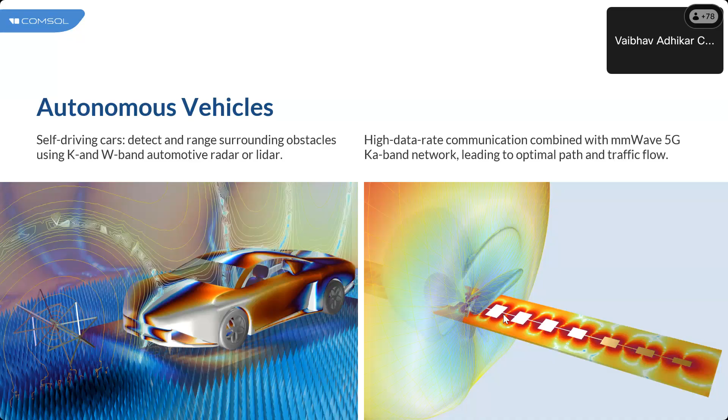Now, let us broaden our view of high-speed communication, moving from tiny electronic devices to something significantly larger, like the cosmos. Indeed, we are talking about satellite communication, a technology capable of enabling long distance transmission by bouncing the signals from one satellite to another satellite. We have witnessed attempts to establish a global internet service by deploying numerous satellites into low Earth orbit.

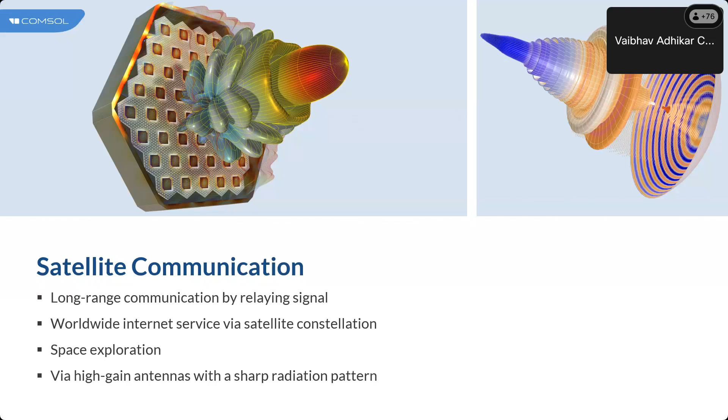Then what sort of tangible components can be represented using these numerical models? They could consist of commercial off-the-shelf antennas as well. It's noteworthy that devices need not be radiating. They could be employed to contain a signal through the process of dividing, combining, or even coupling. Alternatively, they could be selectively focused on a particular band to filter or block the other signals. There exist simulation models that are specifically designed to observe these physical effects.

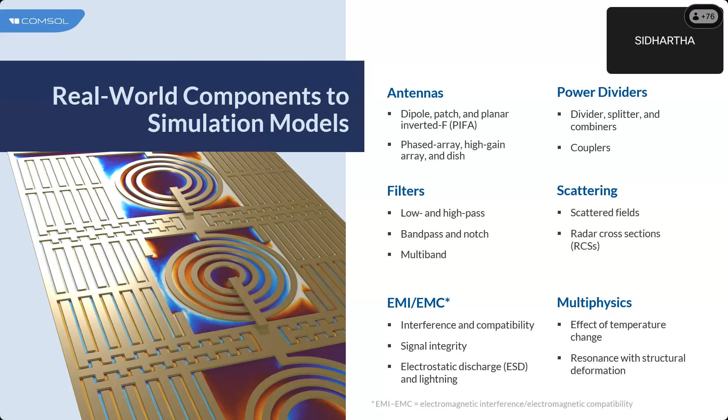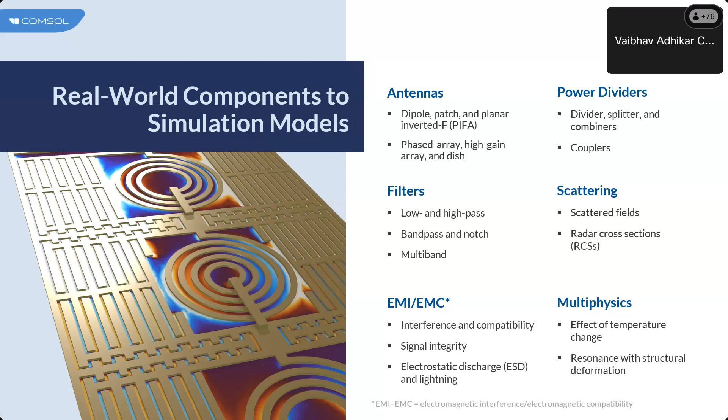Regardless of what these models represent, we typically verify the S parameters or field intensity to be sure about the susceptibility of the device and the extent of the unwanted noise that could be generated. Within the electromagnetic simulation model, it is also possible to incorporate factors such as the thermal drift effect and structural distortion, which can alter frequency predictions.

Certainly, devices such as these we have discussed can all be modeled using COMSOL Multiphysics, a comprehensive software tool that enables the realization of multiphysics simulation.

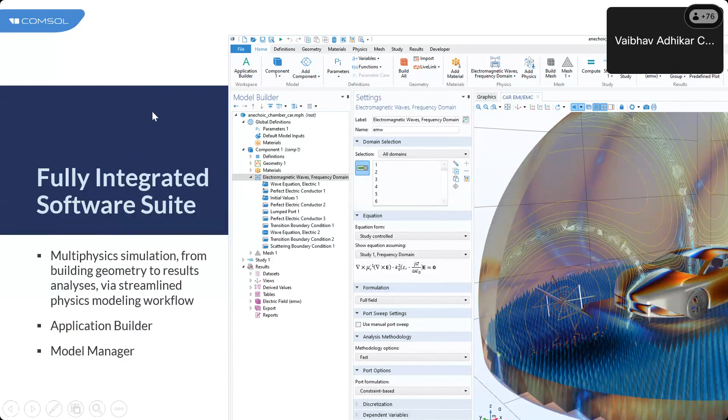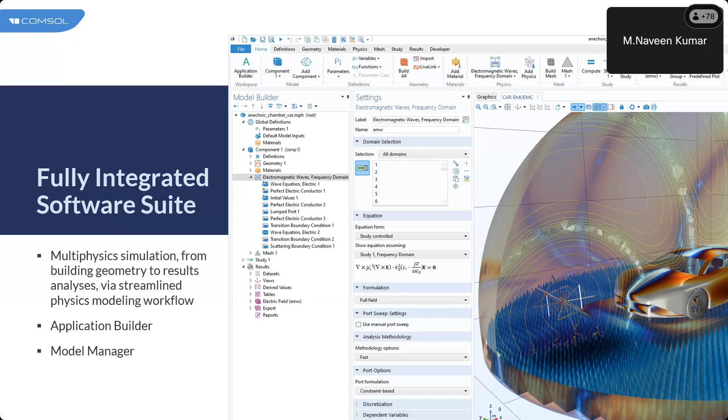Okay, thanks. So in the previous slide I discussed various devices that can be modeled with electromagnetic simulation. And certainly, these devices can be modeled using COMSOL Multiphysics, a comprehensive software suite that enables the realization of multiphysics simulation. It spans everything from geometry creation to result analysis, offering a streamlined modeling workflow.

You can even transform your simulation model into user-friendly apps featuring a more intuitive and tailored graphical user interface. These apps can be shared with peers or clients via web browser or standalone executable files. That does not necessitate additional software license purchases to run these apps.

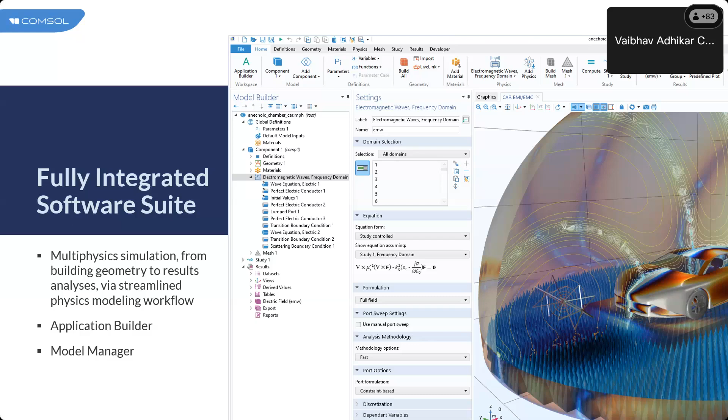Let's take a closer look at the COMSOL Desktop. We present a clean, user-friendly interface where all modeling steps are logged and can be amended later if required. This primarily takes place in the Model Builder window. We enter or choose our custom settings in the adjacent window, and then visualize the results in the Graphics window.

The top horizontal menu here houses the most crucial options, saving you from having to remember the location of specific boundary conditions. Alternatively, you can simply right click here on the physics and

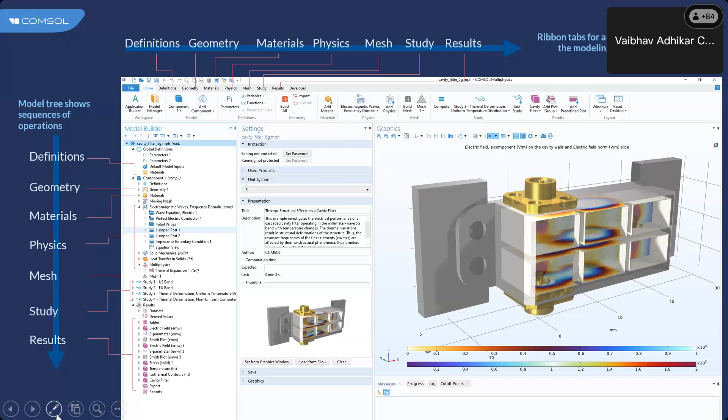With COMSOL, we offer a wide range of tailored software to address electromagnetic phenomena. Indeed, we boast a strong portfolio for electromagnetic simulation, covering low frequency to high frequency, and at times providing faster, more efficient solutions via asymptotic methods.

Now, when we are discussing millimeter wave or sub-terahertz for the next generation mobile network, which product should we opt for? Regardless of the frequency, here we are solving Maxwell's wave equation when running the full wave simulation. However, each module is specialized to offer an enhanced modeling environment for specific applications.

For millimeter wave simulation, the RF module is well suited frequency-wise. The Wave Optics module also addresses the millimeter wave band, but the choice depends on your preference. You may prefer the default setting in the RF module, where you specify the material properties with the permittivity, permeability, and conductivity, along with electrical circuits and the lumped component approximation, analyzing the S-parameter response.

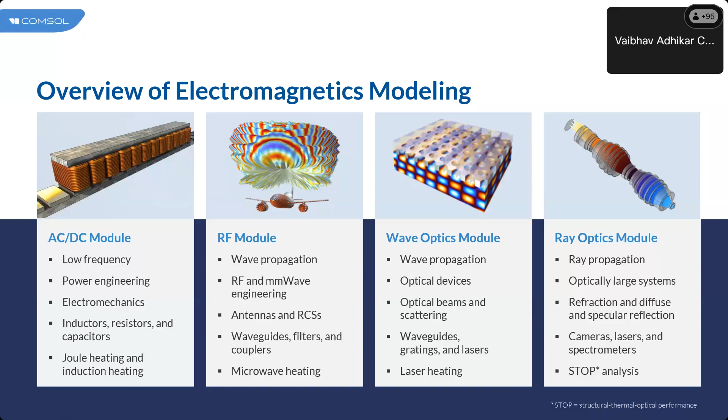Now the question arises, how would we make a simulation model using these modules? For instance, with the RF module. Well, the RF module is a high frequency electromagnetic simulation tool designed to address various electromagnetic phenomena by combining different physics interfaces and study steps.

It is crafted specifically for design engineers focusing on microwave, millimeter wave, or even terahertz applications, facilitating the modeling of components such as antennas, waveguides, filters, passive circuits, metamaterials, or even frequency selective surfaces. It employs the finite element method to calculate the power dissipation.

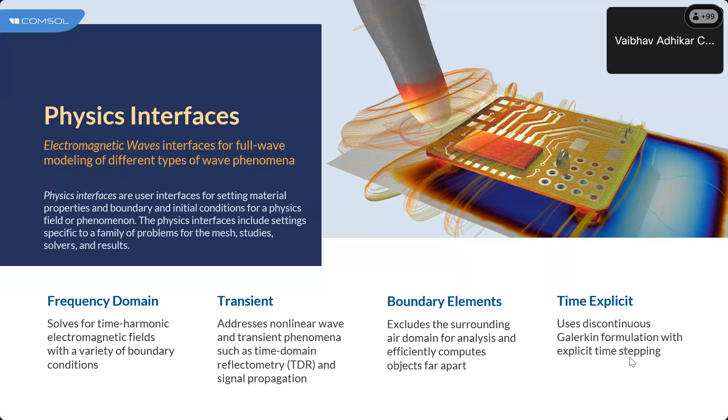Electromagnetics modeling isn't restricted to the frequency domain, but it is also possible to consider time domain analysis. The transient interface is an add-on for studying nonlinear electromagnetic wave behavior and time domain reflectometry analysis. Further, the asymptotic interface will allow for a quick estimation of the radar cross-section of a convex type scatterer.

Additionally, when the coupling between adjacent transmission lines is minimal, the transmission line interface can also save significant time and resources. This interface uses the transmission line equation to solve simulations that typically take several minutes to hours within just seconds.

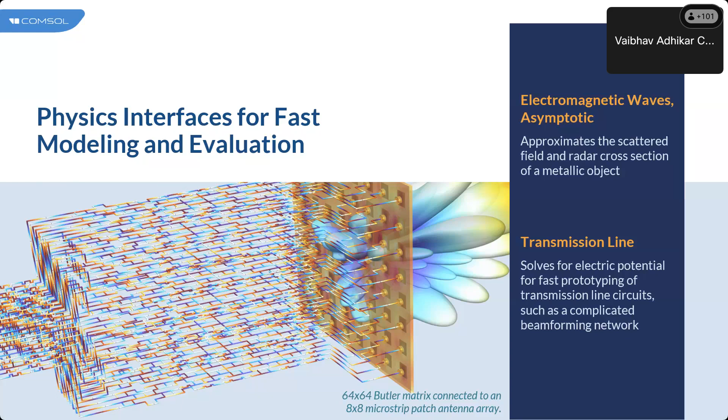You would also have the opportunity to maximize your computational resources by merging two distinct numerical methods, that is the finite element method and the boundary element method. This combination allows precise modeling of the sub-wavelength using FEM, with the results bidirectionally coupled with the boundary element method. This way, we can also observe wave propagation in free space beyond the traditional simulation domain limit. This provides insights into the effect of large platforms where the FEM device is located.

Real world scenarios cannot be fully captured by a single physics domain, as we live in a multiphysics world. Hence, all equations in COMSOL simulation models are fully coupled, allowing electromagnetic fields to influence and be affected by other physics. This capacity for multiphysics study extends the simulation capabilities beyond traditional single physics analysis.

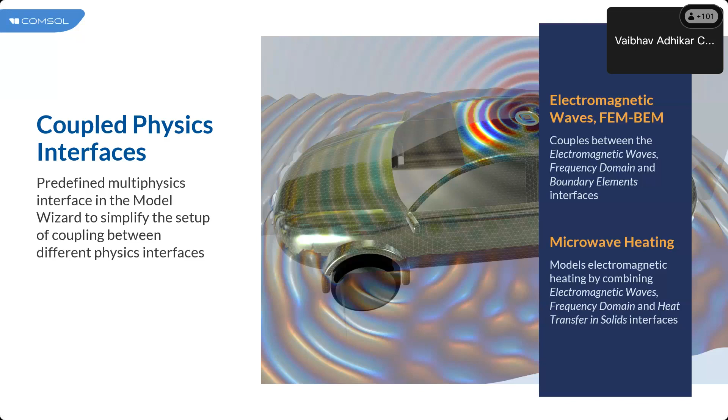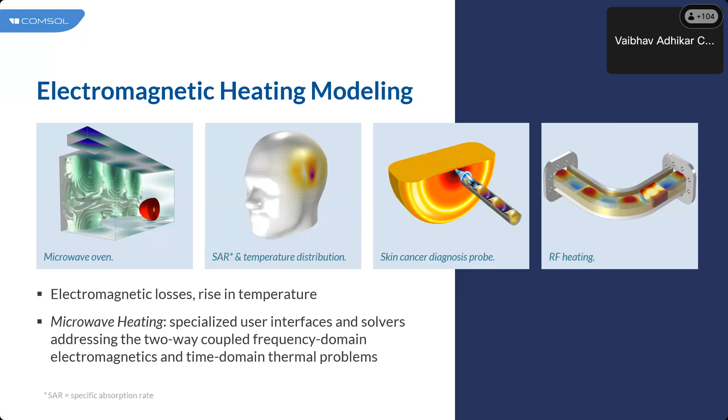For instance, see the combination of electromagnetics with heat transfer. The equations are fully coupled, enabling the interplay between the electromagnetic fields and other physics domains. By solving Maxwell's wave equation in the frequency domain and the heat transfer equation in either the stationary or time domain simultaneously, we can calculate the temperature variation over time and the effects of changing material properties due to these temperature shifts.

Traditional electromagnetic analysis can be further enhanced to include structural deformation, which alters the resonating behavior of your testing devices. Multiphysics simulation effectively captures millimeter wave circuit performance under realistic operating conditions, thereby eliminating the need for expensive and time-consuming environmental tests. Through simulation, the number of iterations in the development cycle is reduced, and it can fast-track the design, fabrication, and testing process.

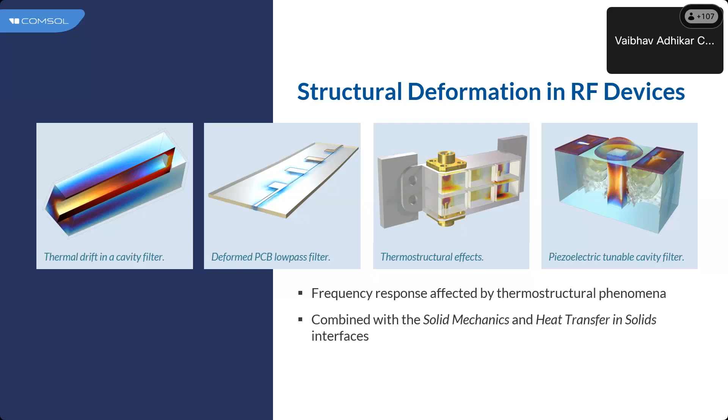In simulation software, the actual world is represented by numerical expressions known as boundary conditions. Consider a semi-anechoic chamber with biconical antennas linked to a network analyzer. This connection can be symbolized by a lumped port. The absorbers on the side walls and the ceiling can be mimicked with an infinite upper half space, minimizing reflection, which can be represented by an absorbing boundary condition.

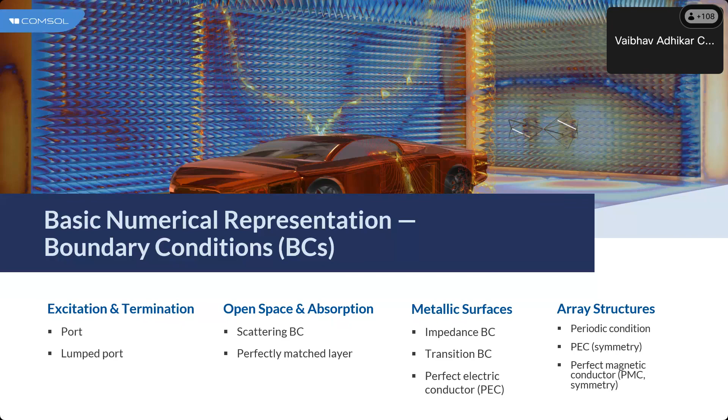If the simulation structure is repetitive, it isn't really necessary to include all the elements. For example, a wall of absorbers could be simplified to a single pyramidal unit cell with a periodic condition. Here you can see a virtual EMI/EMC testing environment setup for vehicles.

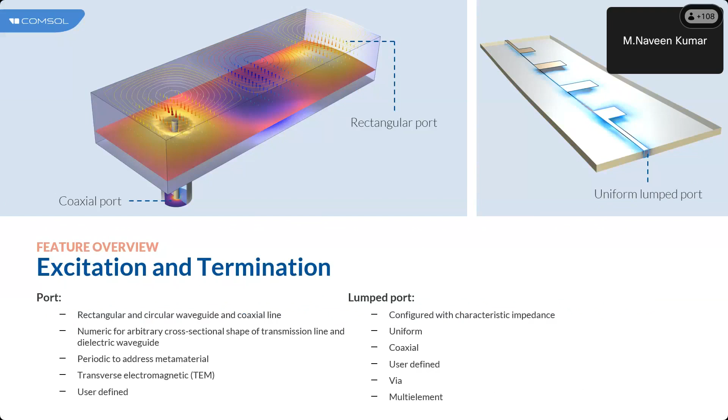Delving into the specifics, the lumped ports and port features are used to excite and terminate transmission lines. These connections are basically to the network analyzer, signal generators, or spectrum analyzer, or it could be matched loads, or termination with custom impedances. This boundary condition provides information about the reflection and transmission, similar to measuring the S-parameters in the lab, and can cater to a wide range of cable types, including waveguides, microstrip lines, and all other applications.

Different types of ports can be utilized for various applications. A user-defined type of port allows for manual definition. Rectangular or circular types of ports are suitable for exciting or terminating the ends of metallic waveguides that could be rectangular or circular. The coaxial type of port can be used even when the characteristic impedance is not known on the end of the coaxial cable connector, or for the matched mode setup.

If you are dealing with arbitrary shaped waveguides and materials, the numeric type of port can find the port modes that you need. In the periodic unit cell, of course, the periodic type of port can be used.

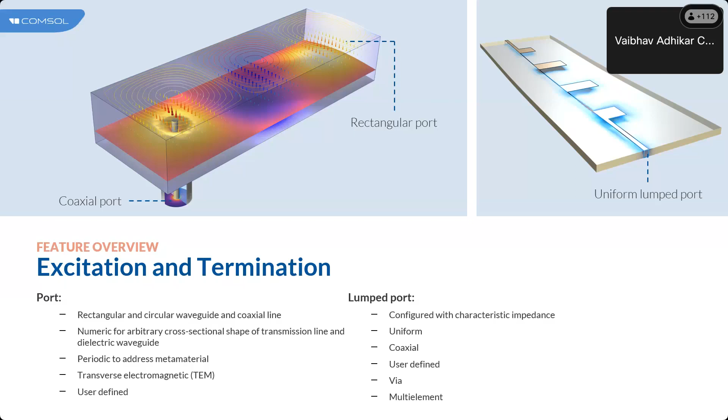When testing these radiating components, it is essential to prevent performance distortion by the components' own radiating fields. Ideally, an infinite space with no obstacle is preferred, often simulated in a fully anechoic chamber. Pyramidal absorbers can be replicated in such a room, but they are computationally demanding. The perfectly matched layer is the most efficient way to represent them, and the numerical representation can be even simpler with a scattering boundary condition.

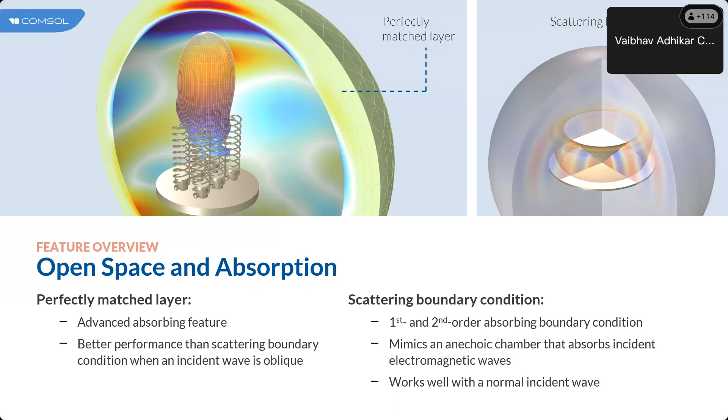Metal is, of course, a key material for high frequency electronics, and it is often used to fabricate the transmission lines which are carrying the signals. There are various ways to represent your metallic objects depending on the expected losses and the desired accuracy. If losses are negligible, a lossless perfect electric conductor, that is PEC, can be used. If it is a lossy thin layer, you can simplify this thin conformal layer to a 2D plane and then apply a transition boundary condition.

For a lossy volume where the wave doesn't penetrate due to the thickness, use the impedance boundary condition. For a traditional microwave application, PEC might be sufficient. However, for higher frequencies like terahertz, addressing the losses becomes important.

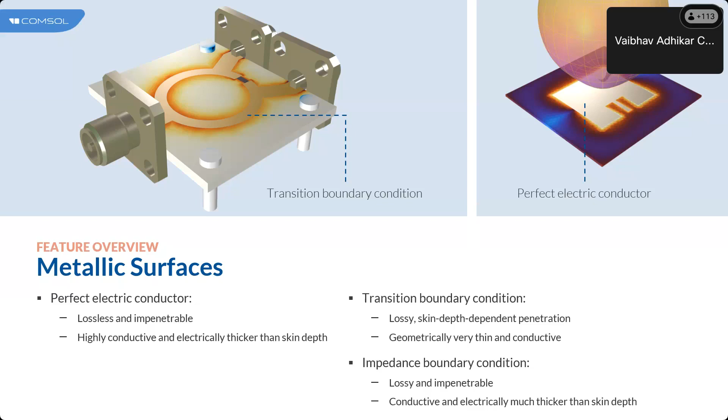The periodic condition is a versatile tool, particularly useful when designing metamaterials or modeling plasmonic grating applications. Floquet periodicity, one of the several types, can handle a wave incident at any arbitrary angle. When the main polarization is known, symmetry conditions such as PEC or PMC can be used. This software contains many more boundary conditions and advanced functionality. What I have outlined here are just the basic ones, but they are sufficient to model typical antennas and circuits.

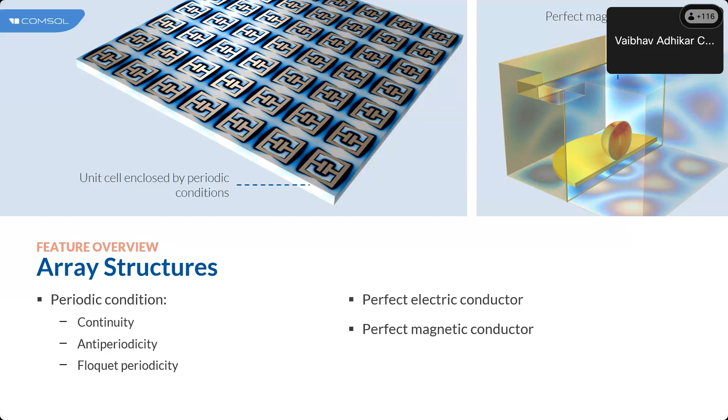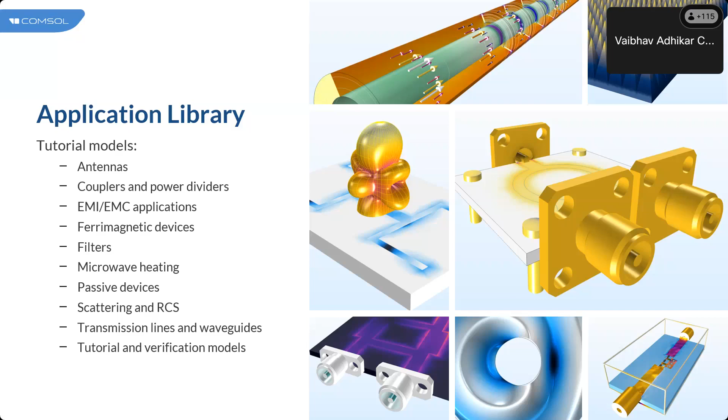So let's put these basic boundary conditions to use to model an antenna array. We will present here a two antenna array model. One is the conventional antenna array, where you will observe both a 3D model and a simplified version, complemented by the widely recognized antenna array factor. So let me go to the COMSOL environment.

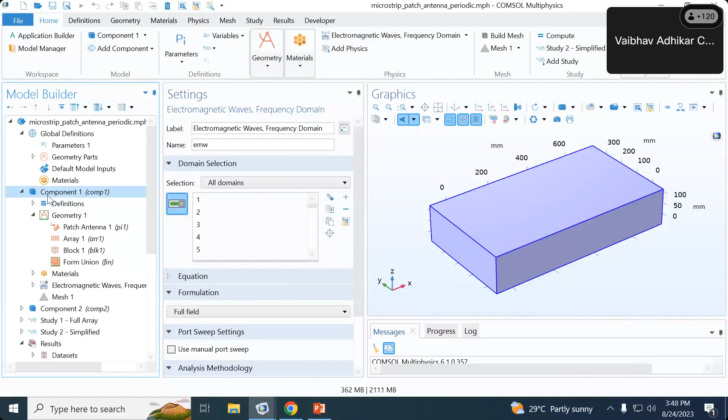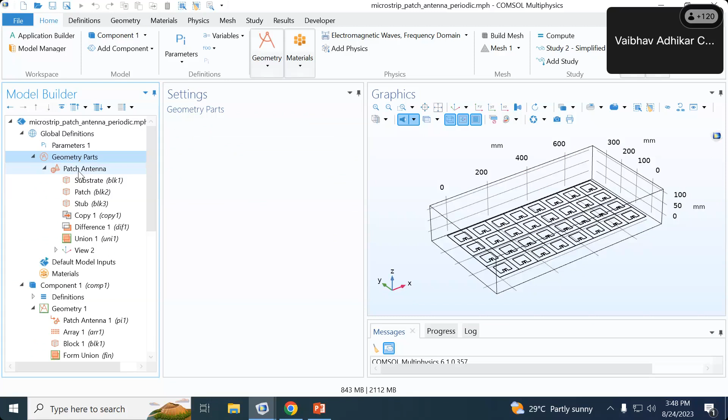So here you can see an 8 by 4 antenna array has been modeled. The patch antenna model geometry is coming from the geometry parts. This geometry part is nothing but a customized, fully parameterized geometry. Here, a user-defined geometry part I have built, and in the later stage, I have multiplied it with the help of the array feature into an 8 by 4 antenna array. I consider the block for the surrounding air environment.

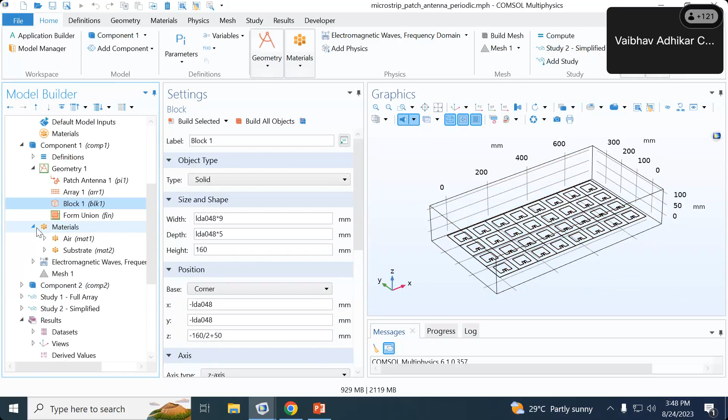Next step is to assign the material properties. The surrounding of this antenna is nothing but air. This is the planar antenna array in the XY plane, and the substrate here I have defined with relative permittivity as 3.38 and relative permeability as 1. And I consider electrical conductivity as 0. That is the ideal scenario.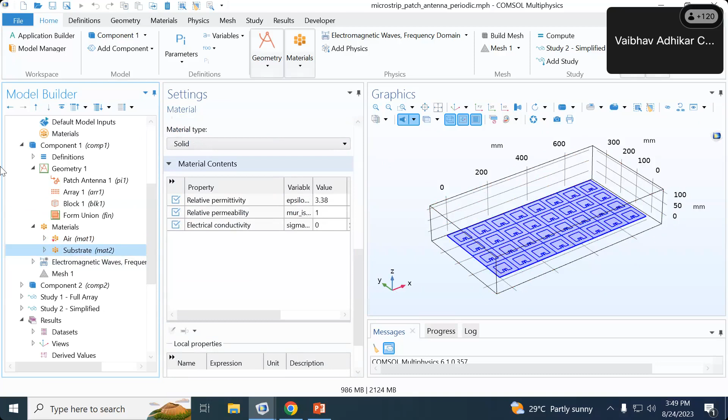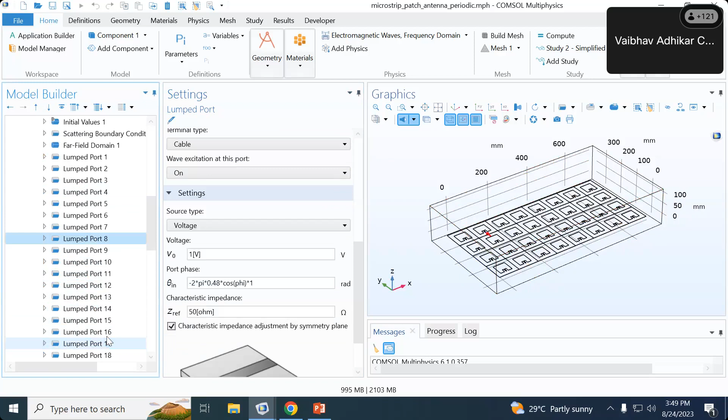Under the physics, here you can see each antenna element is applied with the voltage excitation, and this voltage excitation is having a phase difference. This phase difference corresponds to the cos phi, which basically will steer the antenna main radiation lobe out of the plane of this antenna.

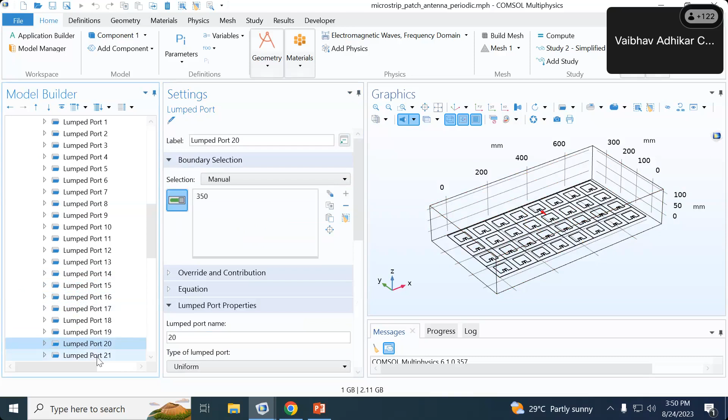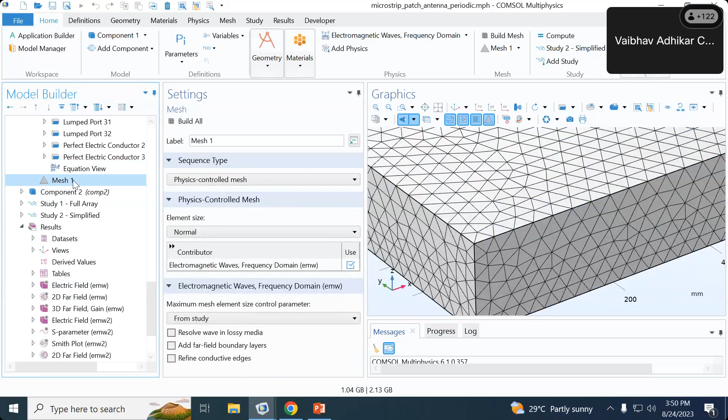So here you can see the progressive phase shift that we have applied. The perfect electrical conductor has been applied to the ground, and perfect electrical conductor is considered for the microstrip patch. After performing the meshing, we solve the study one. Here we perform the parametric sweep for the phase, the progressive phase, that is pi by 2 and pi by 3, to steer the antenna radiation.

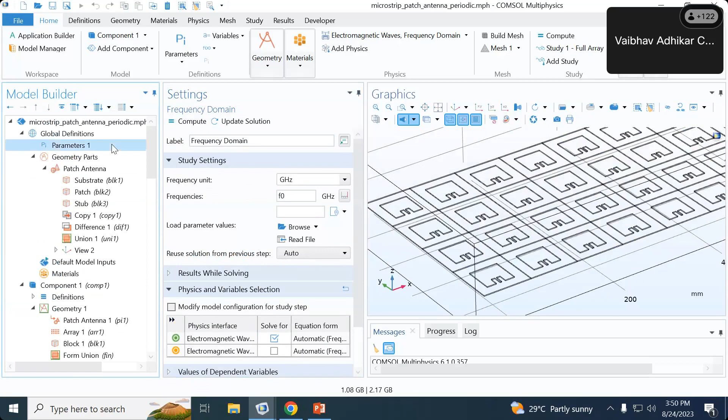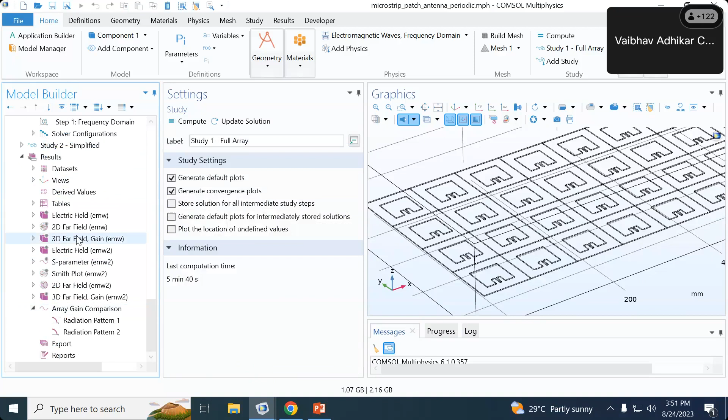I run this simulation for the f naught frequency, and that f naught frequency is basically defined here under the parameters. That is 1.575 gigahertz. This simulation, you can see, took almost 5 minutes and 40 seconds to compute. And after successful computation, we have got the results. So here you can see a 3D electric field distribution.

The far field radiation pattern in 2D, and that too for each phi. So when phi was pi by 2, nothing but 1.57, here you can see the main lobe was around 90 degrees. If I visualize the evaluation plane, this plane is nothing but perpendicular to the plane of our geometry, which is nothing but the xy plane.

And we are plotting the far field electric field in dB form. For phi equal to pi by 3, again the main lobe basically gets steered to 60 degrees.

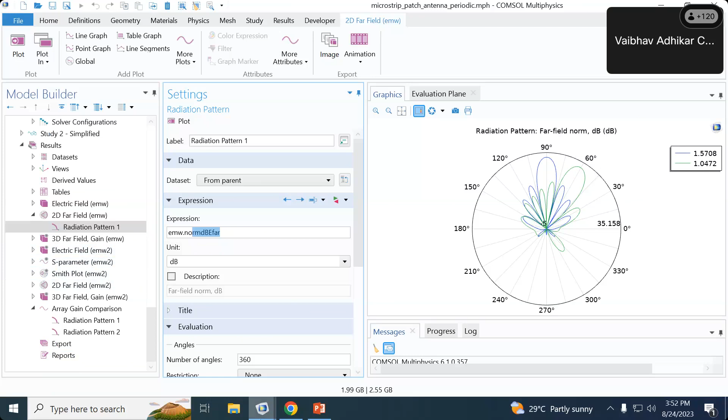So is there any simpler way where we can reduce our computational time? The answer is of course yes. So let us see how we can simulate this antenna array structure. Let us go to the modeling environment, and let me start with the 3D space environment, as this antenna is nothing but 3D.

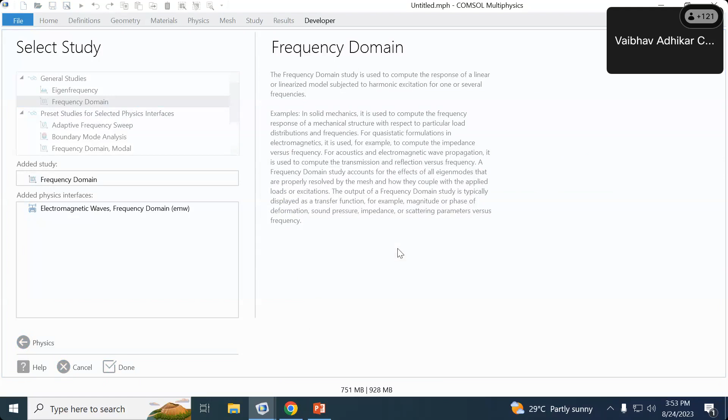Here the software will ask me to select the physics interface. So let me select the physics interface as electromagnetic waves, frequency domain. Let me click on add. The next step is to add a study. I'm going to perform the frequency domain study, and let me click on done. To save time, let me insert the geometry sequence from the previous model.

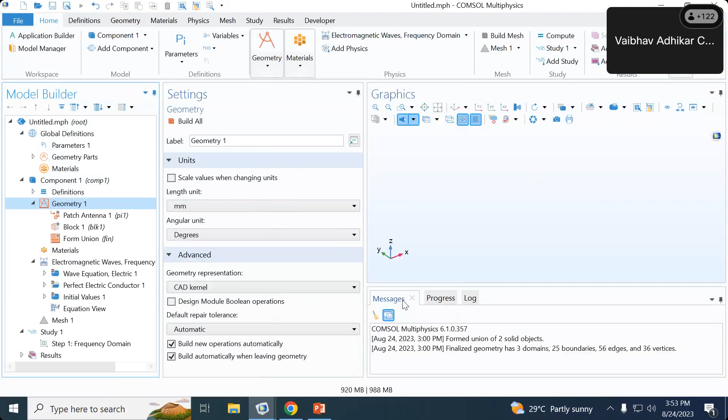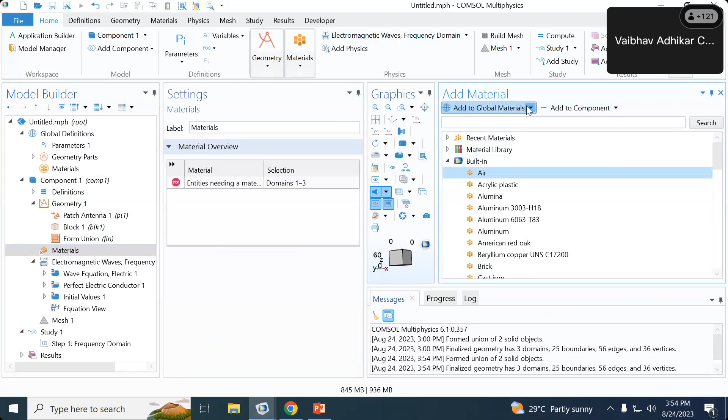Here we are going to only use a unit cell of this 8 by 4 antenna array structure. As you can see, a unit cell patch I have designed, and surrounding it an air block I have designed. The next step is, of course, to assign the material properties. So let me add the material from the built-in section. Air, I will add to all materials.

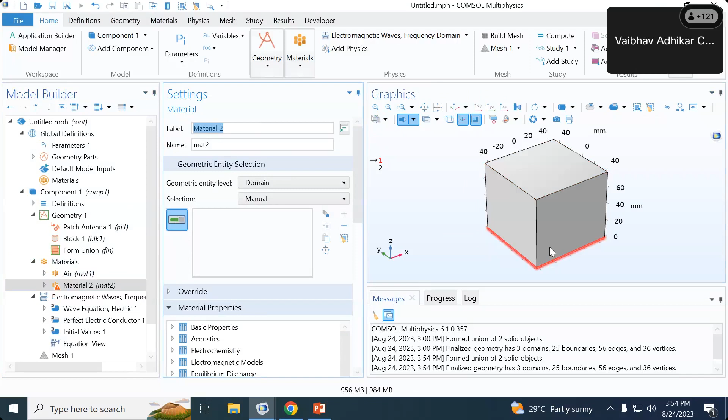If the material properties that you are interested in are not available in the material library, in that case you can definitely create your own material with the help of the blank material option. So let me select this blank material for the substrate. You can also visualize selections by clicking on wireframe rendering. And the material properties here are relative permittivity 3.38, relative permeability 1, and electrical conductivity 0. Now we are ready with the material properties.

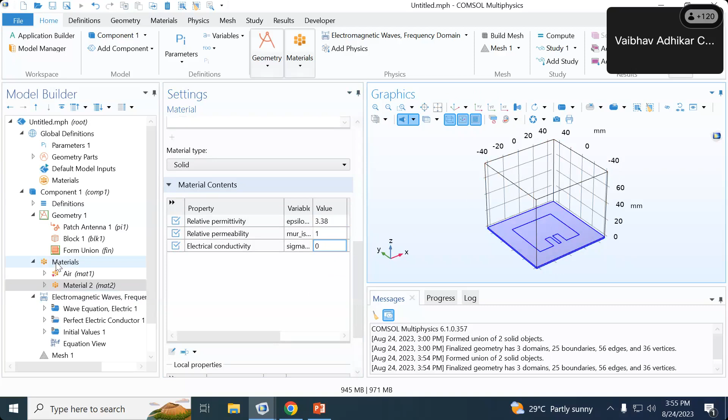The next step we are going to perform in order to consider the infinite array structure: we are going to consider the periodic boundary condition on the side walls. And here we are going to choose the Floquet type of periodicity, and this periodicity will basically take care of the progressive phase difference. So let me add the periodic condition first of all.

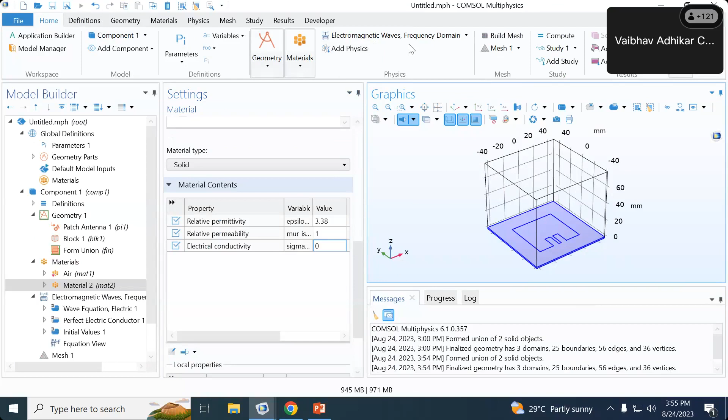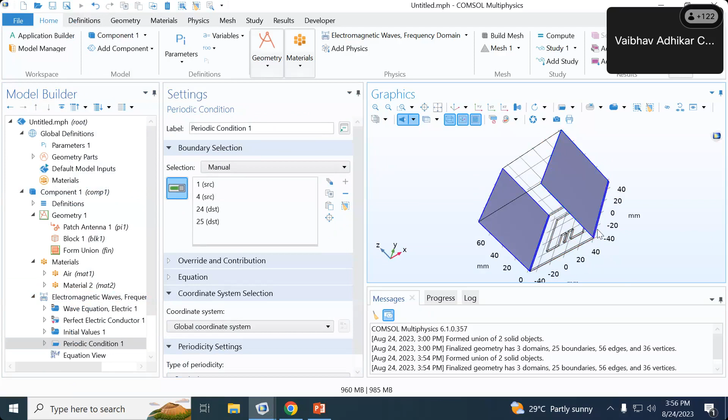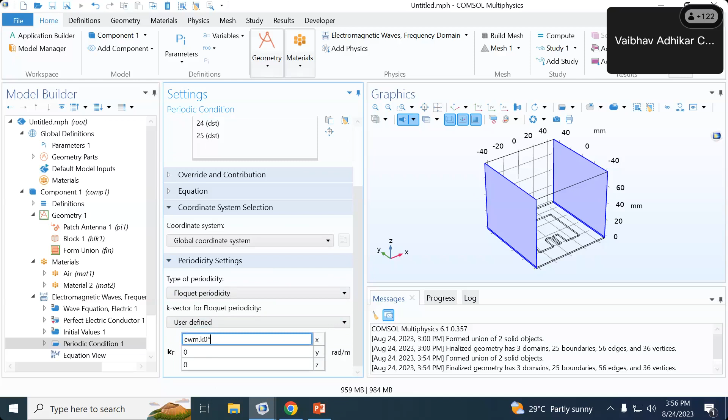If I right click on the physics interface, here you can see a periodic condition is available for the air as well as the substrate. I have selected the x direction. I would like to have a phase difference, and that I can consider by using the Floquet type of periodicity. And here, let me use the wave vector, the emw.k0 predefined variable, multiplied with cos phi.

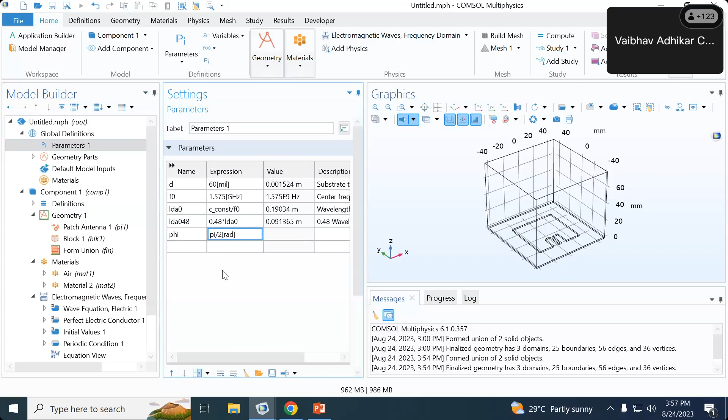So here I need to define a parameter, let's say phi, and it is nothing but pi by 2 radians. This type of periodicity I have applied, emw.k0. Then the next step is to apply the periodic condition in the xz plane.

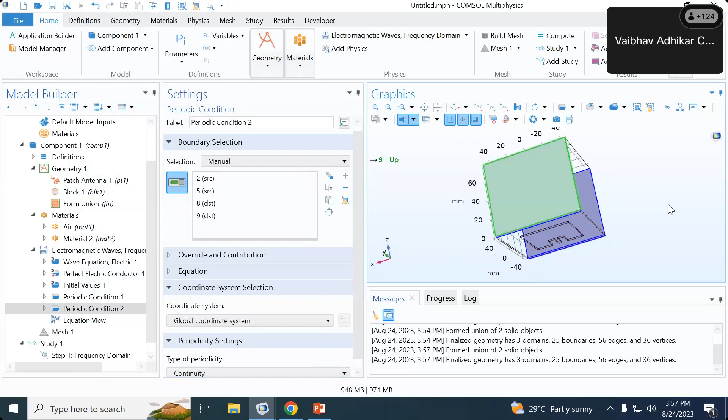Into the xz plane, I can consider it as a continuity type of periodicity where the electric field distribution will be copied from source to destination boundary as it is. The next step is to provide the excitation, and for that I can use the Lumped Port boundary condition.

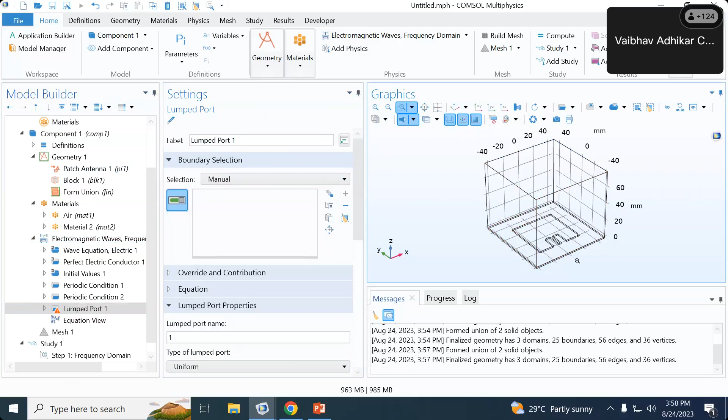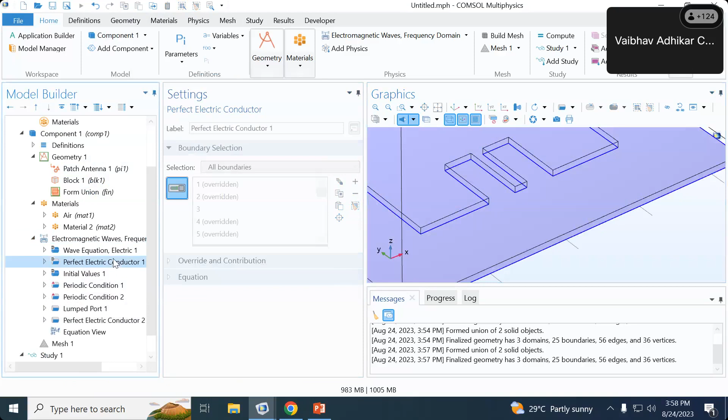I can excite this inset-fed patch antenna with uniform voltage. And let me add the perfect electrical conductor as a boundary condition for my patch. By default, all the external boundaries are basically perfect electrical conductor, so I can skip that.

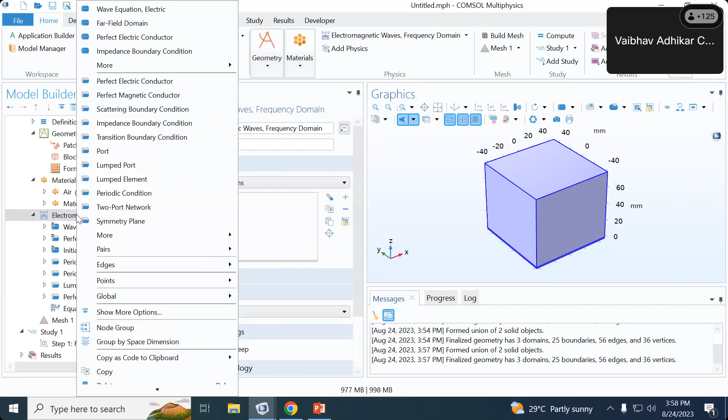The next part: I'm interested in performing the far field analysis of this antenna, so let me add the far field domain here. I would like to perform this far field domain analysis only in the air environment, so let me select the far field domain corresponding to air only.

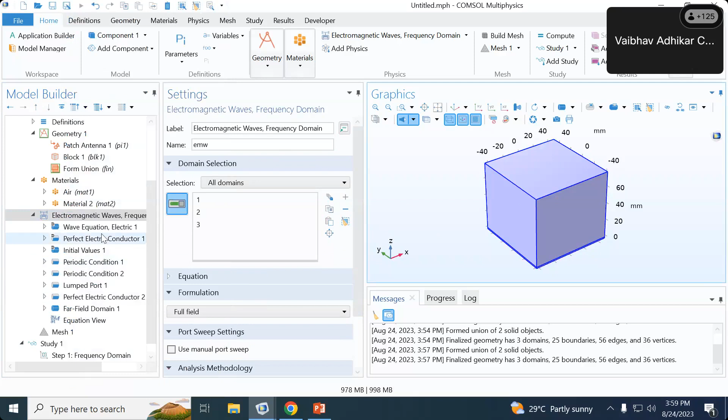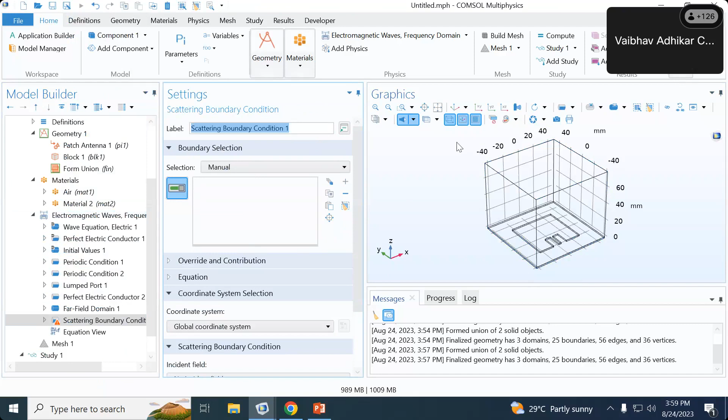Next, as you can see here, the perfect electrical conductor is also applied to the top boundary, which will reflect the electromagnetic radiation and can alter the performance of this antenna. We don't want that, and we can absorb this electromagnetic radiation by using the scattering boundary condition. Now we are set up with the physics.

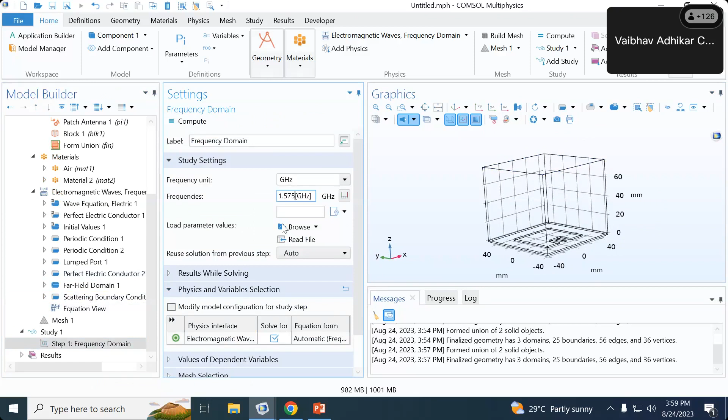The next part: here I am going to perform this analysis for 1.575 gigahertz. You can also visualize the mesh. Some of the boundaries I can also hide so that you can visualize the mesh inside. This meshing looks fine to me.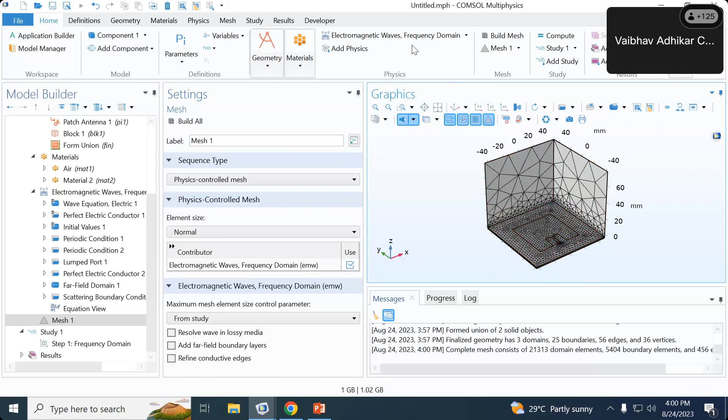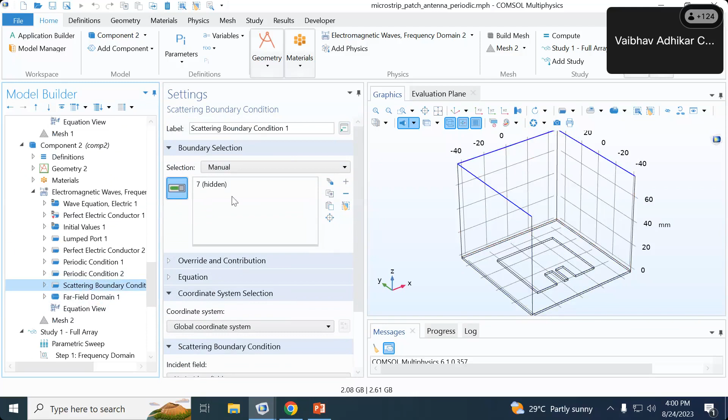To save time, I also have the solved version of this model, so let me open it. Here you can see the solved version. I applied the Lumped Port excitation, the perfect electrical conductor, periodic condition in the x direction, periodic condition in the y direction, and scattering boundary condition for the top boundary, which is hidden here. The far field domain is applied to domain number 2.

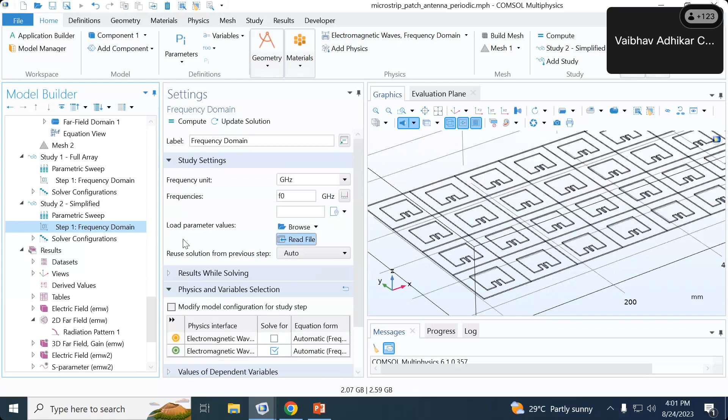We solved study 2 with a parametric sweep for the phi variable for pi by 2 and pi by 3 at a single frequency, and in only 30 seconds we got the results. Now if you compare the 2D far field response, the full 3D array response is represented in dashed form, and the periodic model is represented with solid lines. You can see, at least for the main lobe, a good match between the 3D model and the 2D model.

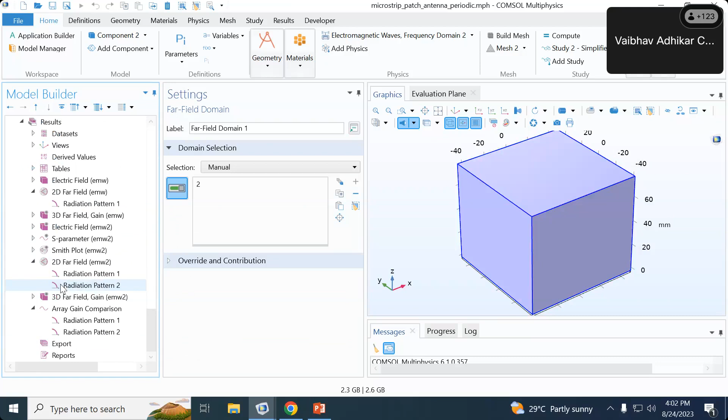One thing to note is that the far field node we added is only considered for the unit cell. Only if I multiply this unit cell response with the well-known array factor will I get the antenna array radiation pattern for this periodic structure. That is what has been done in this expression. Let me expand it.

Here we multiply the far field, the electric field distribution, with the array factor, but in log scale, so this multiplication becomes addition. This is a predefined function available in COMSOL Multiphysics, emw.arrayFactor AF3, where 3 stands for 3D structure. We are considering an 8 by 4 by 1 array, with spacing of 0.48, 0.48 and 0, and the phase variation in the x direction is minus 2 pi 0.48 cos phi, in the y direction 0, and in the z direction again 0.

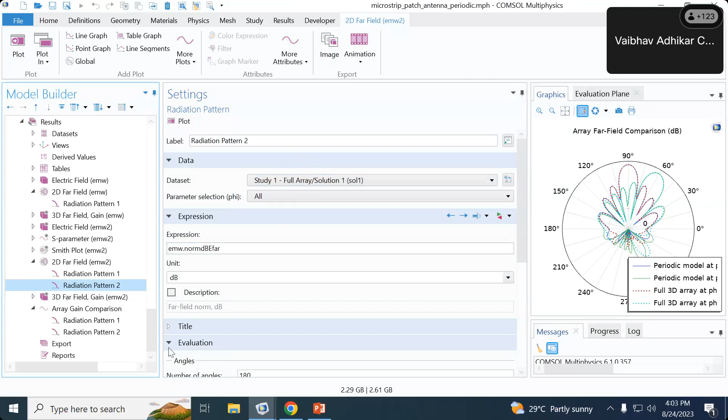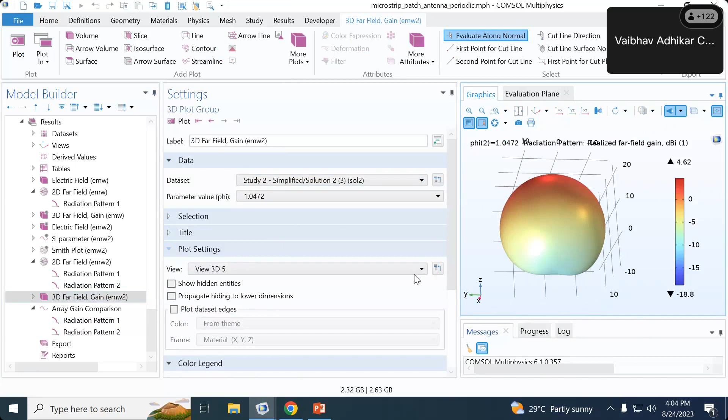Thus we have compared the radiation pattern with the full array simulation. Here you can see the 3D far field pattern representing only the single antenna response, but this far field radiation pattern has been multiplied with the array factor. Here you can see the gain comparison for the periodic model. You can see a good

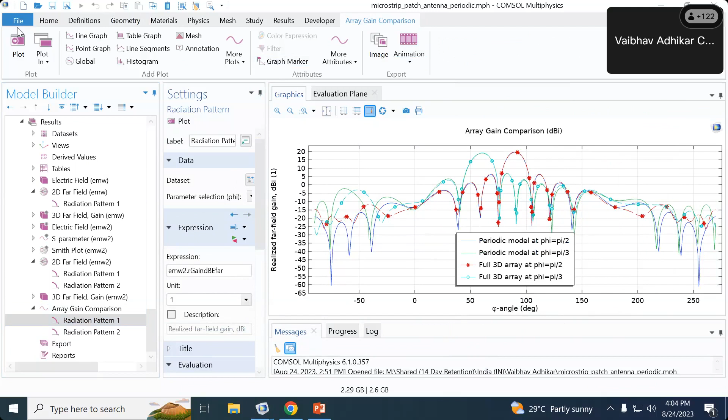Here you can see the full array model and the periodic model. The main lobe is exactly matching, but the far field radiation pattern becomes noisy towards the side lobe levels. This is because we have considered the far field domain only for the single unit cell.

Of course, this is the trade-off we need to address. If you would like a faster response, you can definitely go with such an approach, and you can at least intuitively find the radiation pattern for your antenna array structure. I hope this demonstration was helpful for you. Let me go back to my presentation.

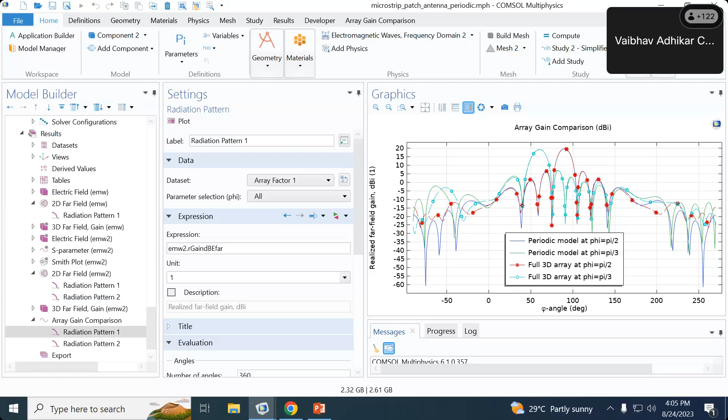Indeed, the Application Gallery offers tutorial example models as well as detailed instructions. Even without COMSOL, you can access and download this documentation, which will allow you to learn about the modeling workflow, as well as the design principles and the motivation that guides the creation of all these models.

If I browse you through the website, once you come to the COMSOL web page, here at the bottom you can find all these resources: blogs, learning centers. The physics-wise classification has been done here. And this is what I was talking about, the models and application files. Here more than thousands of examples are available.

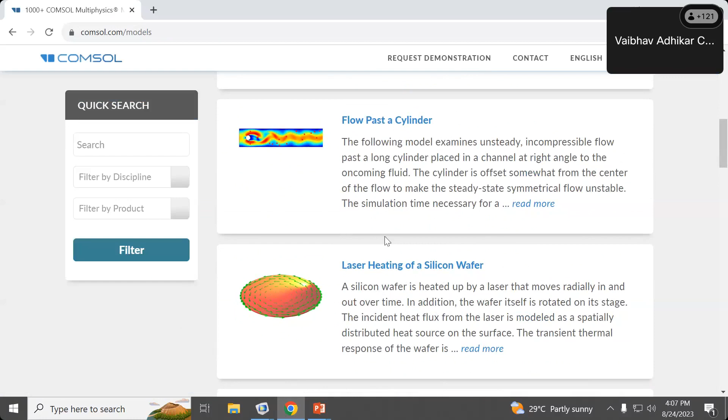And all of these examples come with the model file, that is the .mph file, and the PDF instruction file, so that you can learn from this. You can have access to the introduction and how to build this model from scratch. The introduction is present, the notes about the COMSOL implementation, and the step-by-step instructions to build this model from scratch to get these results.

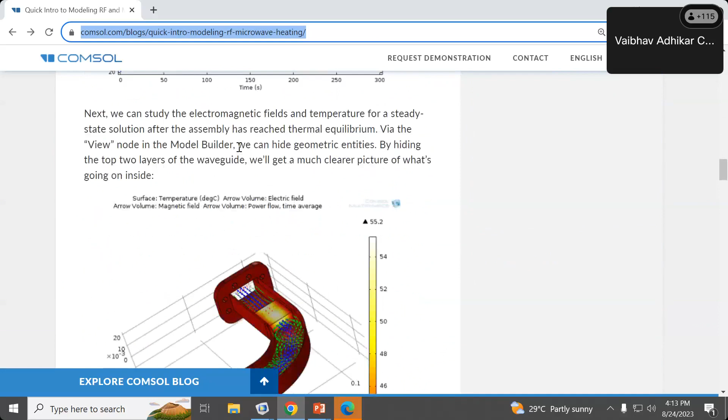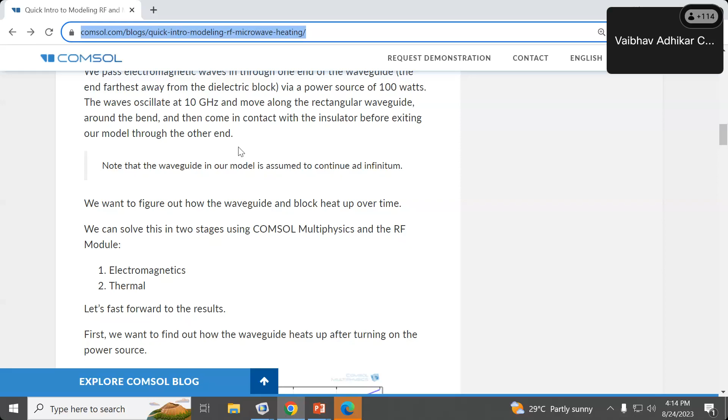Okay, I think there were questions in the chat box also. I think I missed this part. Bhagwati was asking about transmittance and reflectance, which module should I use? As in my discussion, by default, with the Wave Optics Module you will get the transmittance and reflectance graphs. But with the RF Module also, you will have default plots for the S-parameter response. And by applying the standard conversion, you can convert the S-parameter values into transmittance and reflectance.